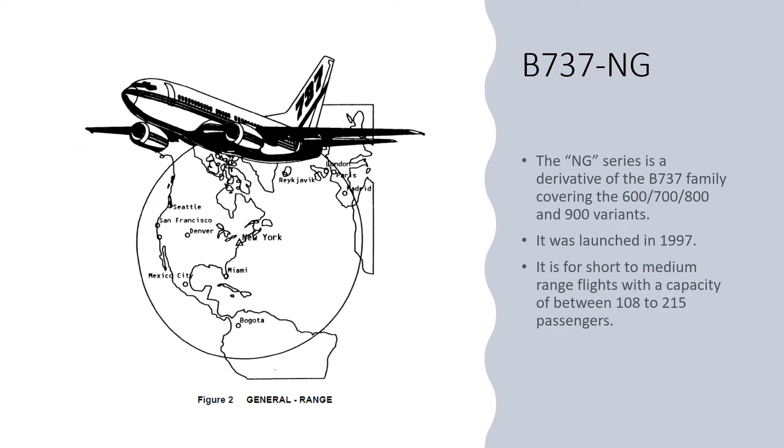Called NG series, or Next Generation series, is a derivative of the 737 family, a development of the old-fashioned classic. Covering the 600, 700, 800 and 900 variants. It was launched in 1997 and is for short and medium range flights, with a seating capacity of between 108 and 215 passengers.

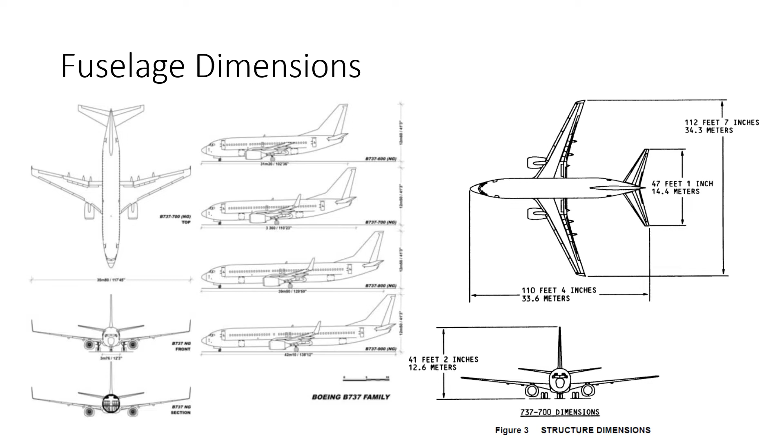This is the fuselage dimensions and body stations. All of these station references, whatever we're measuring, are always given in inches. And they have basically 3 main areas: the body station line, the body buttock line, and the water line. There are others for the wings and the pylons, etc., but we won't go into those at the moment.

The body station line is a horizontal dimension, and it starts at station 0. Now, station 0 is a point in front of the tip of the nose. It's basically a point on the jig in the factory. So the first bit of aircraft that we hit in terms of the body station is the tip of the nose, which is at station 130. And then all the station numbers after that, working backwards, increase in number, given in inches.

The body buttock line is a lateral dimension, and you measure it from either the left or right of the aircraft center line. So if you took the fuselage at the bottom of the picture there, that circle, and cut it in half vertically, then we have the left side and the right side, referenced in the traditional way, i.e. standing in the aircraft looking forward. The center line is station 0, and then we've got left or right, and the number giving you so many inches from that station 0.

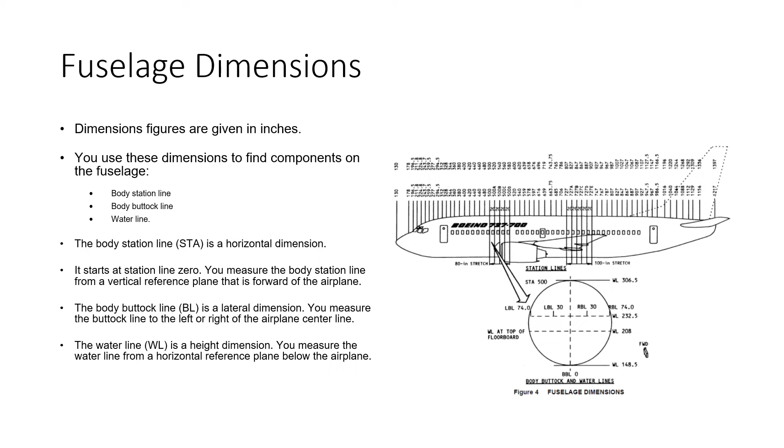NGs are powered by 2 CFM56-7B engines. Obviously, we'll look in detail at the power plant system when we do module 4. So this is just an overview, to give you a rough idea of what's going on. So we have 2 CFM56-7B engines with an EEC controller.

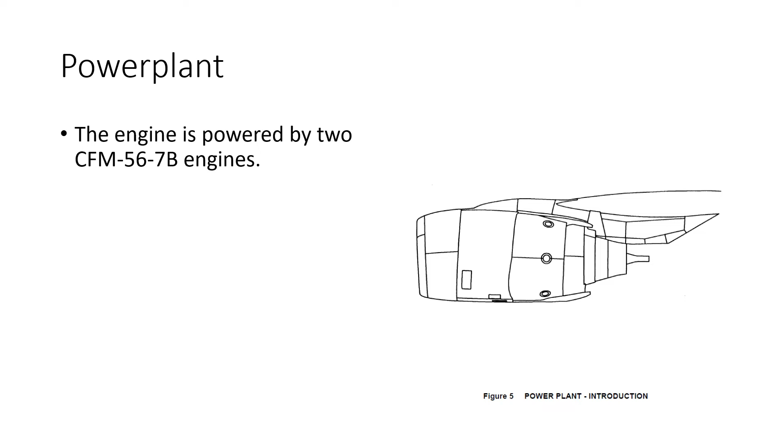If you do need to approach an engine when it's running, when you're doing leak checks, etc., there are two safe entry corridors where you avoid the intake and you avoid the exhaust. So basically it's a 45-degree plane from about 5 feet behind the intake on either side of the engine.

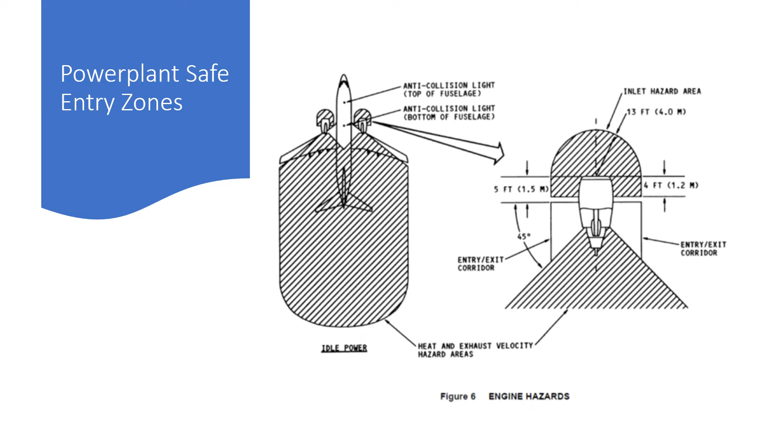Flight control surfaces, so we have primary and secondary flight controls. The primary flight controls comprise of the ailerons, there's one on each wing, 2 elevators and the rudder. We've also got spoiler panels on the wings. Those of you who are converting from Classic to NG, you'll notice there's 2 extra spoiler panels, and also they are numbered differently. We'll look at that on the next slide.

Secondary flight controls comprise of the leading edge flaps, 2 per wing, leading edge slats, 4 per wing. Again, those of you converting from the Classic to the NG will notice now we've got 2 extra slat panels. Trailing edge flaps are 4. We've got a total of 12 spoiler panels, 6 per side, there's 10 on the Classic for those of you converting, and that comprises of ground and flight spoilers, of course, and the spoilers are numbered differently for those of you converting, and for those of you who aren't, this is it.

So spoilers are identified 1 through to 12, running from left to right. So on the left wing, the far outboard spoiler panel is spoiler panel number 1, and they just count sequentially inboard and then carry on, starting with spoiler panel number 7. This is the first panel on the right hand wing all the way through to 12, which is the far outboard panel on the right hand wing. We've also got movable horizontal stab, of course, and leading edge slats, leading edge flaps.

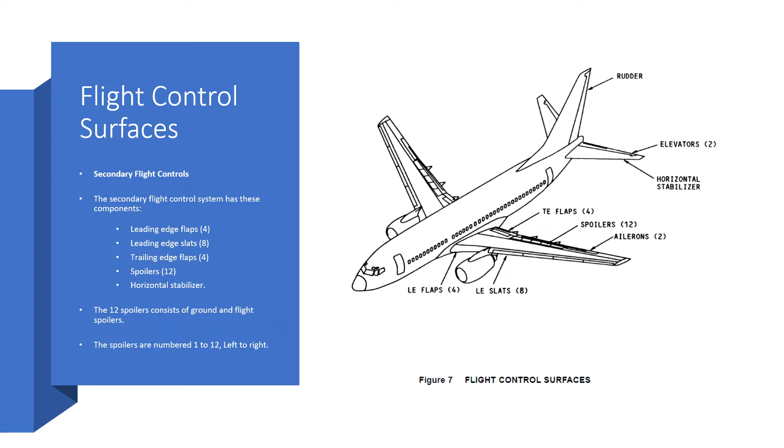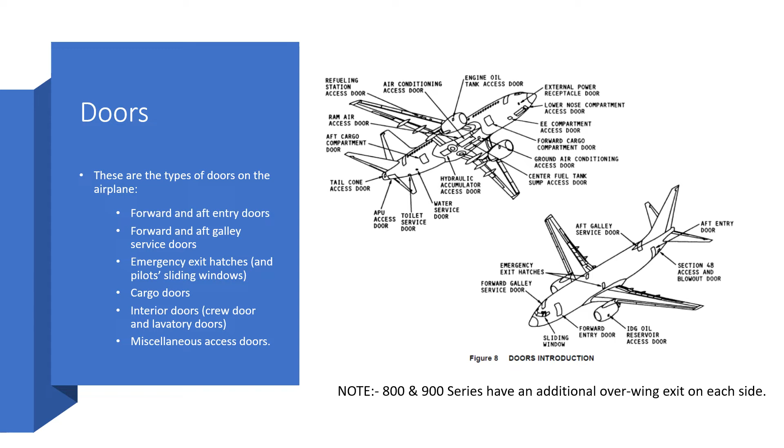We've got cargo doors forward and aft on the right hand side, lower part of the fuselage. There's various interior doors, the crew door and the lavatory doors, of course, and then we've got various miscellaneous access doors to get access to the avionics compartment, the APU, and various servicing panels.

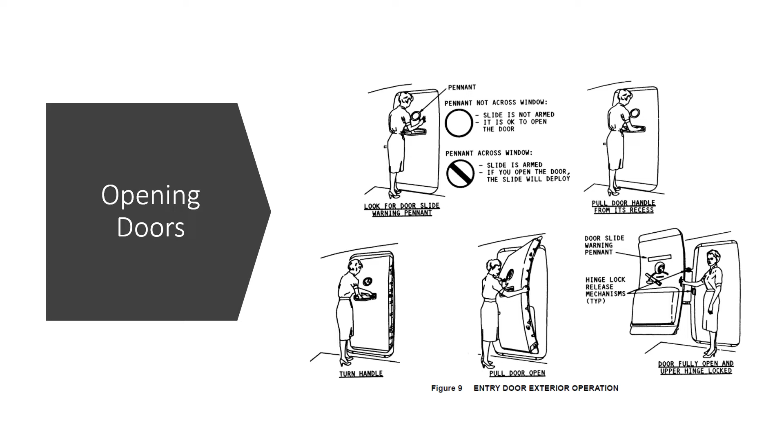The biggest takeaway when opening the main entry doors, the biggest thing that's going to cause you either embarrassment or even injury is if you try and open the door when it's armed. So the first thing is to make sure it's not armed. If you're opening it from the outside, there's a little placard or a pennant that comes across the little viewing window. If it's clear, the door is safe and you can open it. Don't try and open the door if the escape slide is armed. Apart from that, you need to go out to the aircraft to practice doing it.

Open the door from the inside, but once again, you need to disarm the slide first before you try and open it. Once you disarm the slide, you can open the door safely, and the door kind of swings in towards you, swivels round kind of 180 degrees and opens up, moving forward of the entrance hole. Unlatch the door with the control handle after having disarmed the slide, and turn the handle towards the open direction. That puts the door in the cocked position. You push the door through the door frame until it's fully open, and use the assist handle to do this so you don't fall out.

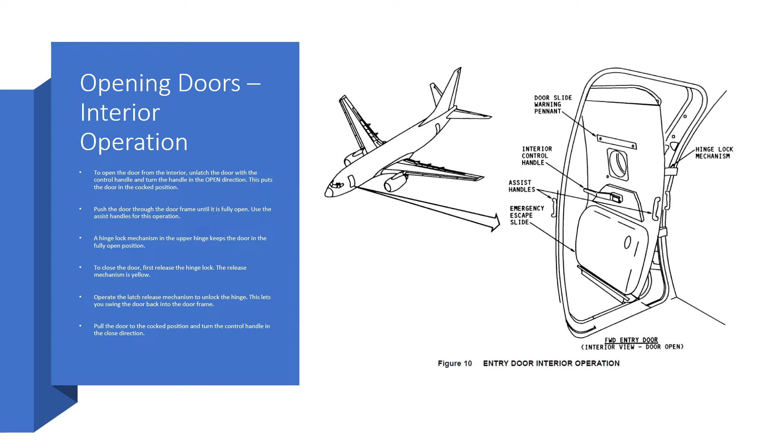A hinge lock mechanism in the upper hinge keeps the door held in the fully open position. When you close the door, you first have to release that hinge lock. The release mechanism is yellow, so it's easy to see. Operate the latch release mechanism to unlock the hinge. This lets you swing the door back into the door frame. You pull the door into the cocked position, turn the control handle to the closed position, and you're good to go. Then, obviously, if you're departing, the crew would then arm the doors once they get the instructions.

Inside the flight deck now, we're looking at the flight deck now, and all the panels are identified with a P number, P1, P2, and so on. They will become second nature; by the end of the 5 modules, you will know these off by heart. So if you said to me, where's the so-and-so control, I'll say it's on the P5 panel, and you'll know exactly where it is, okay?

So all the panels are identified with a P number, P1, and so on. P1 is the captain's instrument panel. P2 is the center instrument panel right in the center there. P5 is the overhead panel and is actually made up of a forward bit and an aft bit. The forward panel is where most of the systems controls are. So you've got 2 P5 panels, an aft one and a forward one.

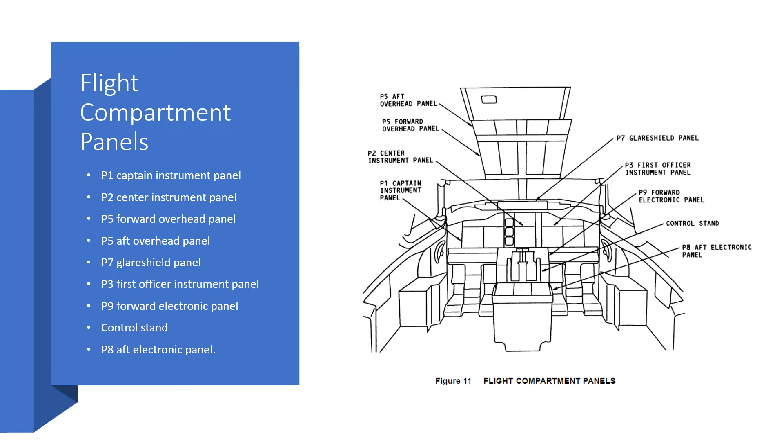P7 is the glareshield panel, it's above the instrument panel. P9 is the forward electronic panel. Then we have our control stand, where the throttles are. And the P8 panel is the aft electronic panel. And we'll take a look at what's on each of these panels in a second.

Showing you in a bit more detail the main instrument panels, comprising what's shown here, the P1 panel, the pilot side, and the P3 panel, the first officer's side. So the NG is a glass cockpit. So you have your display units there, the outboard and inboard display for the pilot and co-pilot respectively.

We've also got on the instrument panels a couple of clocks, one each side, 4 display units on those 2 panels, a display select panel which we'll go through when we get into indicating and recording, later on in this module, master dim and test switch, yaw damper indicator, brake pressure indicator, GPWS or enhanced GPWS control panel, some various lighting controls, and there's a little air outlet for the air conditioning.

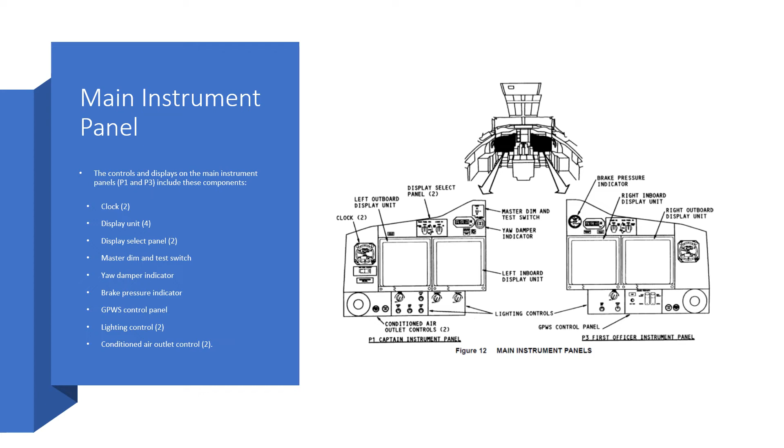The glareshield panel, we've got master caution annunciators, left and right hand side, system caution annunciators, left and right hand side. There's a mode control panel for the autopilot. There's an EFIS control panel to manipulate the screens and control various functions on the EFIS, the electronic flight instrumentation, and fire warning lights, one each side.

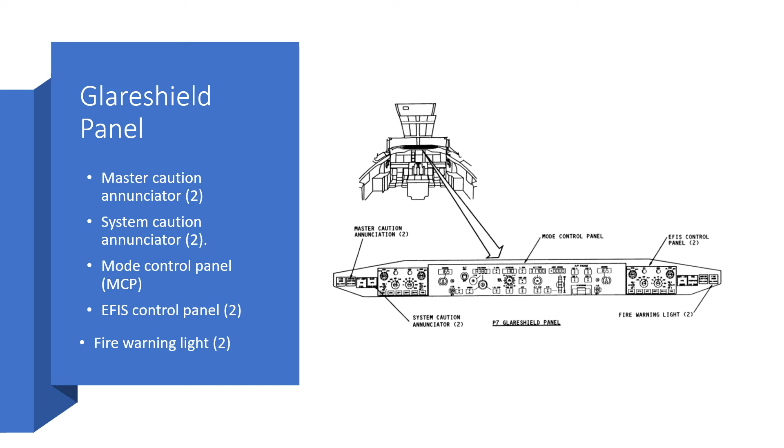The instrument panel in the center of the main instrument panel is the P2 panel, and also shown here is the P9 panel, which is on the forward part of the center pedestal. So on the P2 panel, we've got our standby instruments, engine display control panel, the anti-skid and auto brake switching and lights, flap position indicator, landing gear selector lever and position indicator, and the upper center display unit.

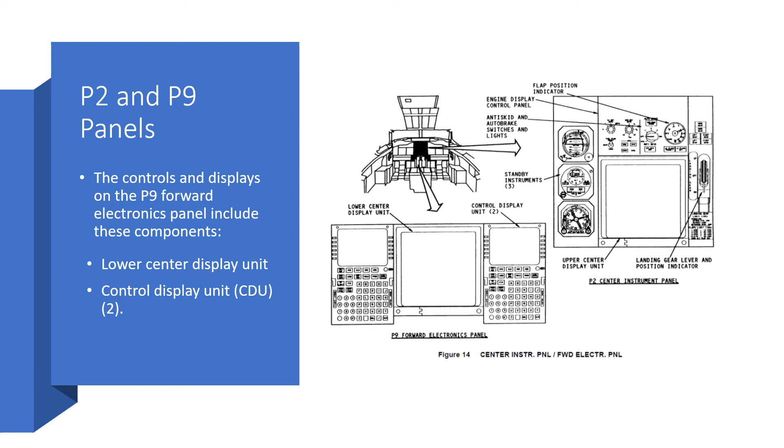P9 panel, we've got the lower center display unit and 2 CDUs, that's control display units. Again, we'll look at those in detail when we get into those systems, but it's where you sort out your flight management system and various other functions.

Going back down the center part, the center pedestal, we've got our control stand comprising our thrust levers and thrust reverse levers, the speed brake control lever, the horizontal stab trim wheel and indicator, parking brake lever and indication light, flap selector lever, and the engine start levers.

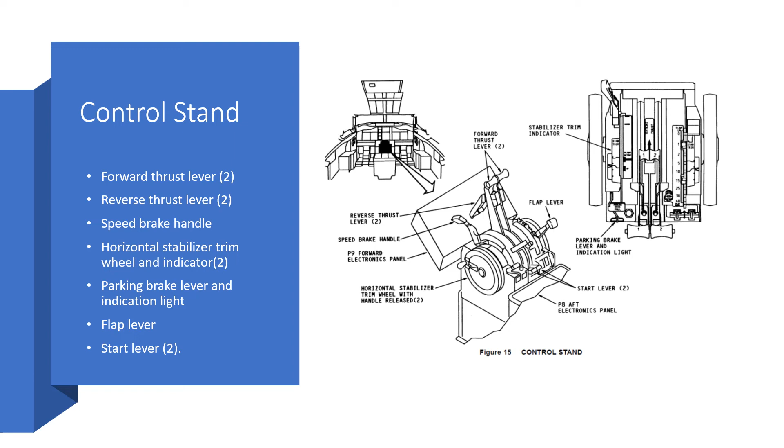Moving back down the center pedestal, we've got the P8 electronics panel, or the aft electronic panel. So on here we've got various system controls for the weather radar, the fire protection system, TCAS and ATC control panel, VHF radio controls, nav control panels, audio panels, the aileron and rudder trim control panel, some various lighting controls, a printer if you have it, and the ADF system controller.

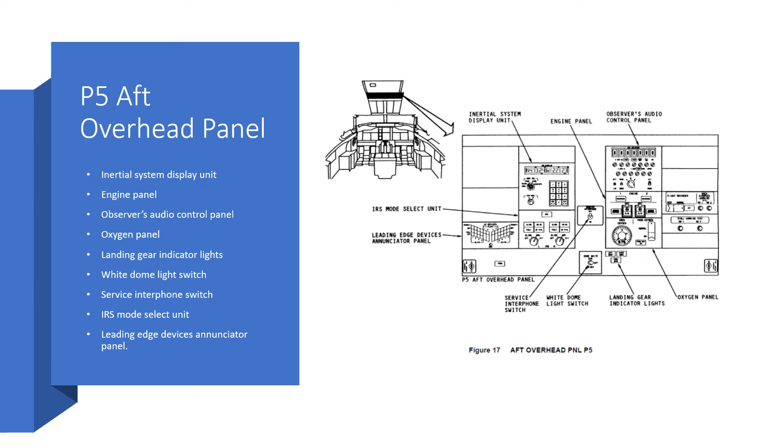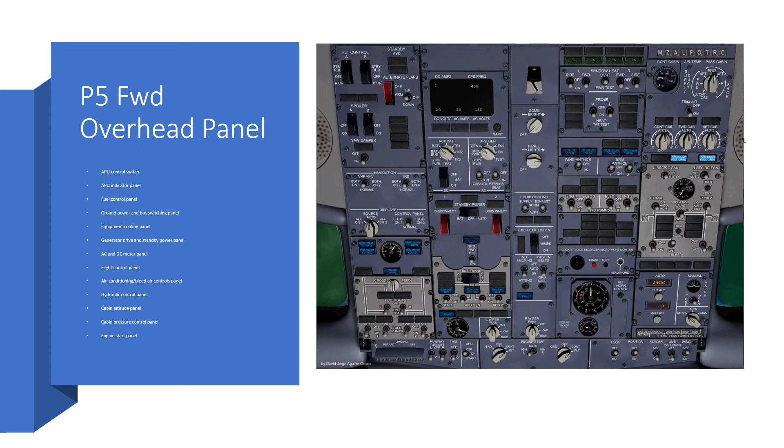It's the forward P5 panel. It's where most of the aircraft systems are controlled from. So on this overhead panel, the P5, we've got the APU control switch and indicator panel, fuel control panel, ground power and switching panel, equipment cooling panel, generator drive and standby power panel, the AC and DC meter panel, flight control panel, air conditioning and bleed controls, hydraulic controls, cabin altitude panel, cabin pressure control panel, and engine start panel.

Most of the avionic LRUs, etc., are in the electronic compartment. This is a compartment below the main cabin floor, just aft of the nose wheel well. On the ground, you can enter this compartment through a door in the bottom of the fuselage. It's otherwise known as the E&E compartment. This access door is located just aft of the nose landing gear. Inside the E&E compartment, there are 5 standard equipment racks identified as E1, 2, 3, 4, and 5.

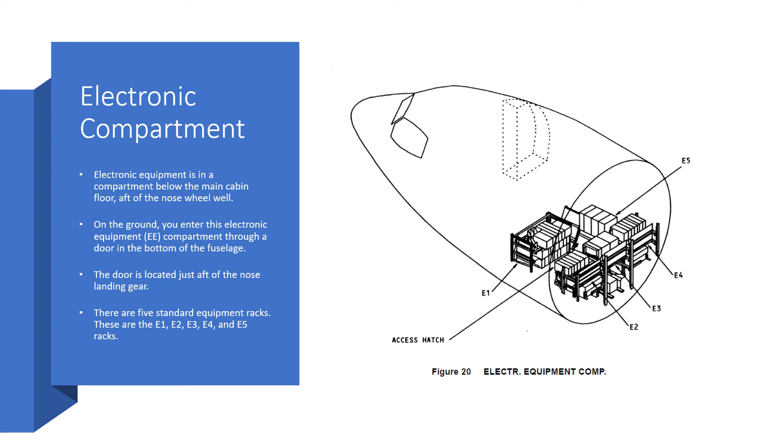The E&E compartment is a pressurized compartment, and it's accessed through a door just behind the nose landing gear bay. It's a plug type door because it's pressurized. So to open the door, there's a push button trigger release to release the handle, and then you pull the handle down. You turn the handle counterclockwise to disengage the latch pins. When the latch pins are free, you can then push the door upward and slightly to the right to the first detent, and then push the door to the right to the fully open detent.

When the door is fully open, the roller tracks can be folded to give you better access to the equipment racks. A spring catch on the end of each roller track holds the track in the folded or unfolded position. To close the door, before you close it, release the spring catch, extend the roller tracks and make sure the door frame area is completely clear. Pull the door out of the fully open detent, then restrain it as gravity causes it to slide down the tracks. When the door reaches a lower detent, you can release it.

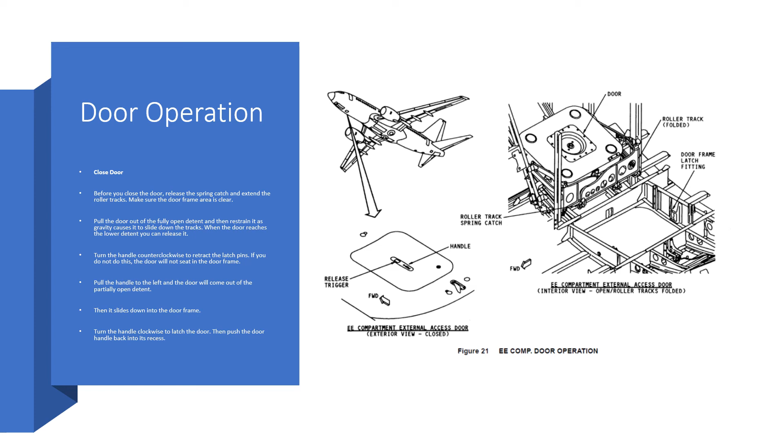Turn the handle counterclockwise to retract the latch pins. If you don't do this, the door will not seat in the door frame properly. Pull the handle to the left, and the door will come out of the partially open detent. Then it slides right down into the door frame. You can then turn the handle clockwise to latch the door, and then push the door handle back into its recess.

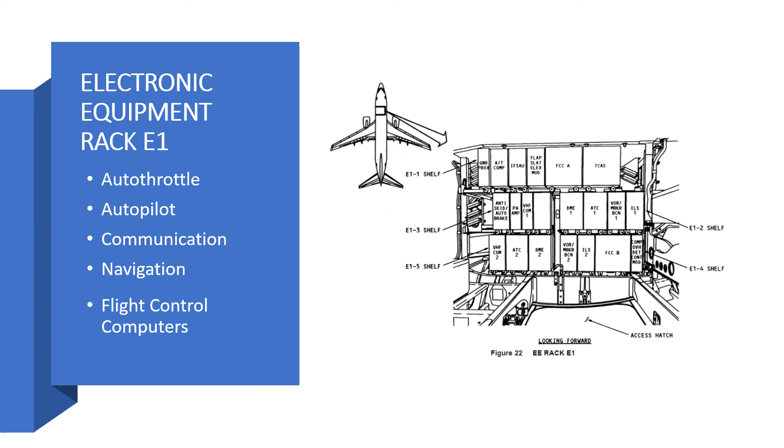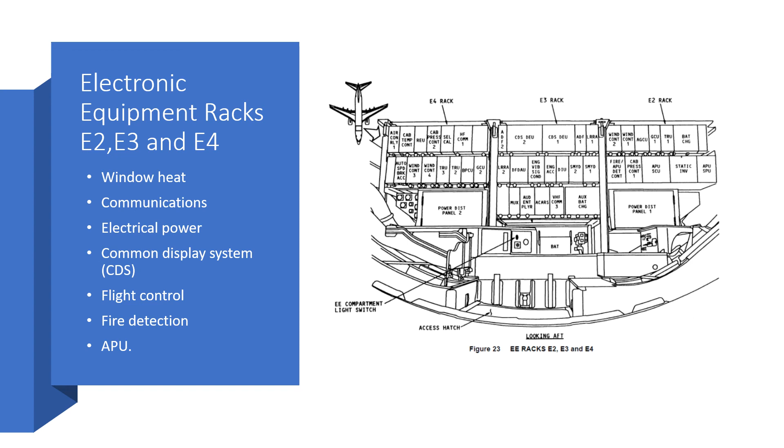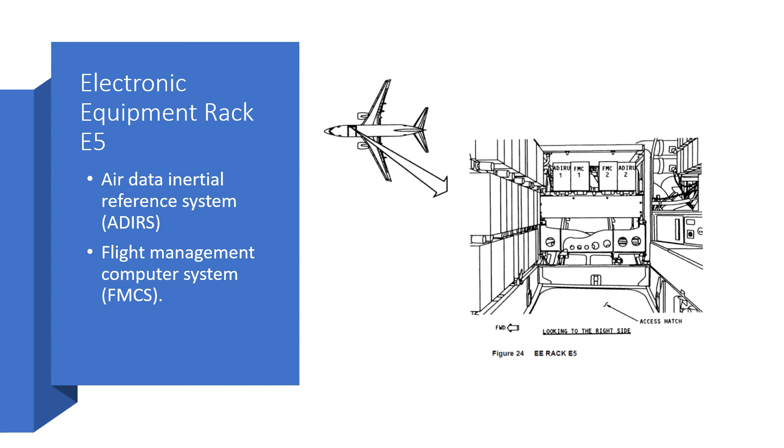Inside the E&E compartment, looking forward, you'll see the E1 rack. On the E1 rack, you've got various boxes, including the autothrottle, the autopilot, comms equipment, navigation equipment, and the flight control computers. Looking rearwards, you'll see equipment racks 2, 3, and 4. On here you've got, again, a whole bunch of boxes, including the window heat, some more comms, electrical power distribution boxes, the common display system computers, the flight control system computers, and fire detection and APU controller. To the right, you've got the E5 rack. On here, you've got the air data inertial reference system and flight management computers.

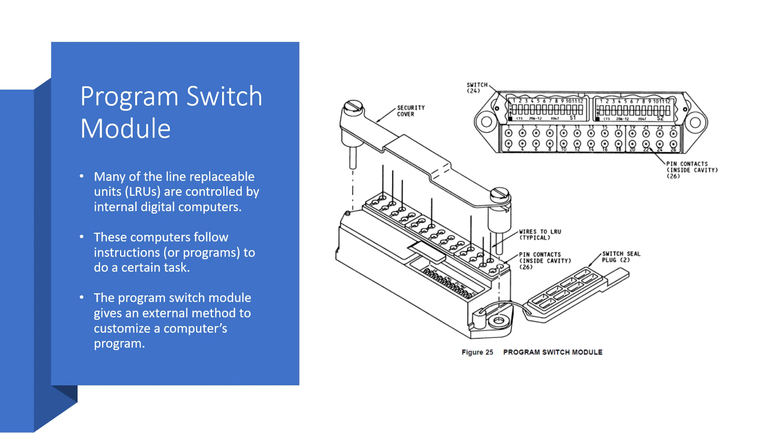So a lot of the LRUs are controlled by internal digital computers, and a lot of them are kind of off-the-shelf computers that need to be personalized so that it knows it's installed in a 737, either 600 series, 700 series, 800 series, etc. So a lot of that personalization is done through pin programming. So we have something called the program switch module, and they are just pins, and we can see some dip switches there that we can set up in accordance with the AMM. It will give you the position of the dip switches if you need to configure it, so that all the modules get personalized to that particular airframe.

So the following LRUs have loadable software: the flight management computers, the display electronics unit, the ACARS, the flight data acquisition unit, the aircraft condition monitoring system, ACMS, the airshow, the EEC for the engine, and the APU engine controller. However, as a caveat to that, for the EEC and the APU controller, we'll need a special data loader. But for everything else, you can use the onboard aircraft data loader.